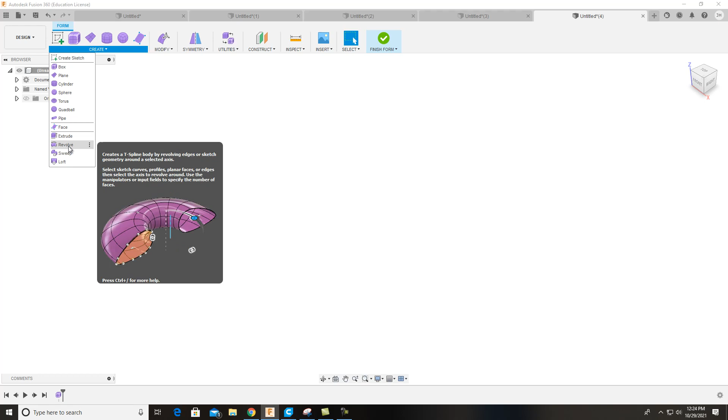And if you drop down here, you'll see you have extrude, revolve, sweep, loft, everything that you've used already in solid modeling that you can access. So let's show you a little bit about this, and I'm going to delete this off right there. There we go. Now, let's get into this.

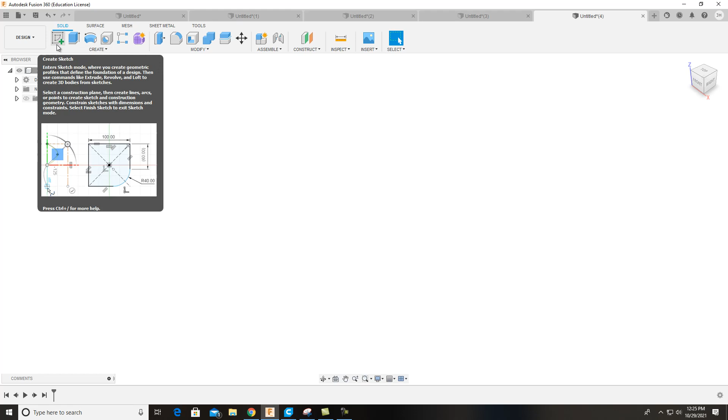So first, I want to draw just the normal way of drawing a sketch and extruding it, and this is what you're going to do for this lesson as well. So I've got some existing work that I'm working on. I've got a linkage between two pieces that's pinned together, and in the center, the actual spline that's holding those 2 points, I want to make it in an organic shape.

We're going to take and sculpt it just like additive manufacturing does. It takes these shapes that are more natural looking, more curves in it and things of that sort, as opposed to kind of the way manufacturing is now, straight lined and everything of that sort.

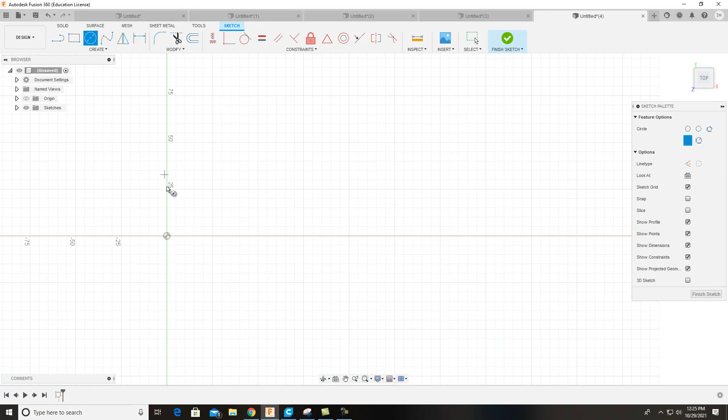So let's say, for instance, I want to put this on here, and I want you guys to do the same thing. I want to make a 50 diameter here. I'll make another, let's see, 60 diameter there. Let's go a little bit larger. Let's go 70. And I want this same thing over on this side, okay?

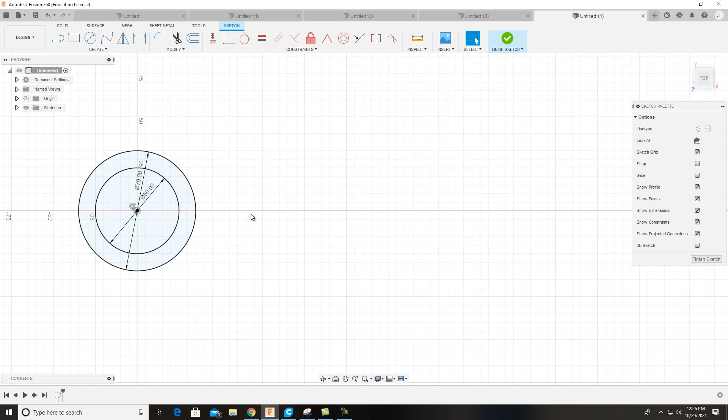And we'll do it, let's say 200 millimeters, okay? So again, this one would be 70, and we'll do this another one. That's 50.

Now, dimension them out. I want these both to be about 200 millimeters away. And as far as the vertical on them, we'll do that too. I'd rather them to be, click on this and click on that. And so undoubtedly they are perfectly aligned. Yep, because they won't let me do a vertical on it. So they should be straight on that line.

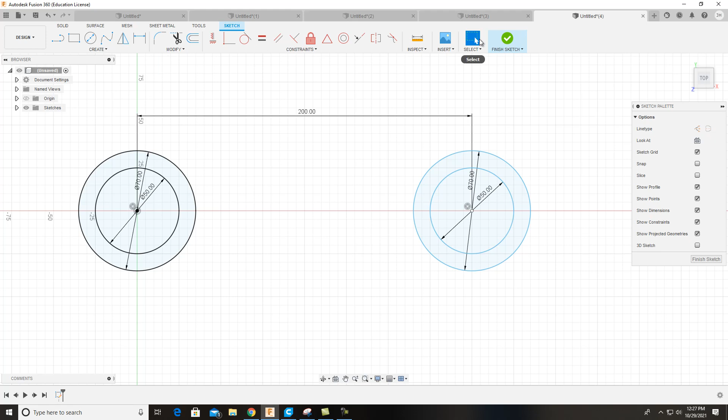And go ahead and extrude it just like you normally do. Make a solid out of it. I always like to turn it when I make a solid. So extrude, catch that point and catch that. Extrude it up about 30 millimeters. Now right in the center of this thing, I want to put a linkage between these, okay?

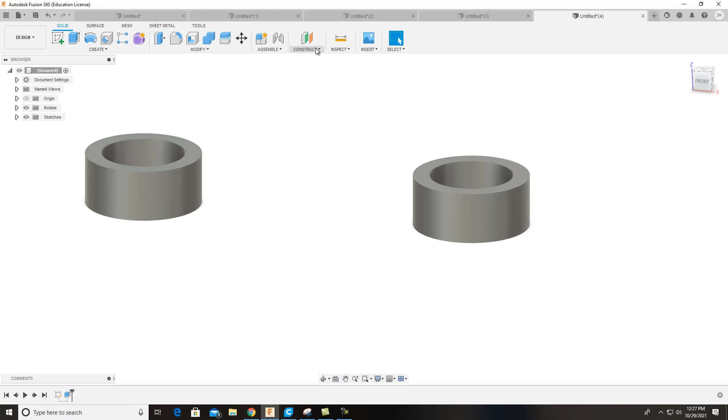And to do so, I want to go up here and set myself a work plane right in the middle. So go to Construct, come down to Midplane, catch the top of that. Rotate it over and do that. See how it puts that in there, hit OK on that, and you're good to go.

Now what I want to do is take and make me a sketch on the face of this. I want to go ahead and, like I said, these are solid, and I want to go right in between these and make some type of weird organic shape, you know, something different than just a straight line, okay, that connects the two. So to do that, there's something I need to do.

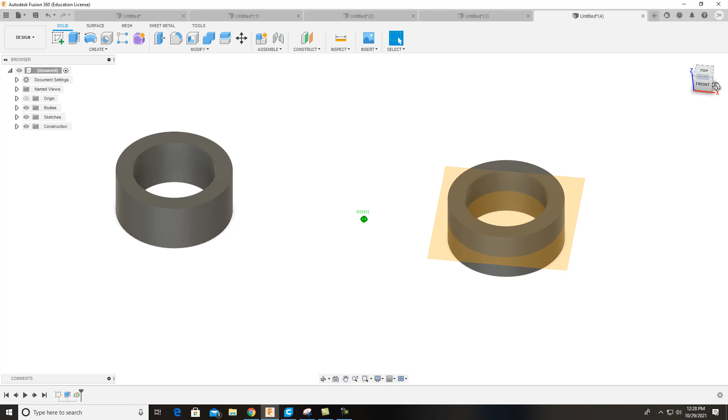Now, I can go right here to Create Sketch, and I could put that in there, okay? So I click right on that new plane that I made, and I'm just going to start in here inside of this. Or actually, before I start that, I want to go here to Create, because notice how it's not picking up on the tangents or anything.

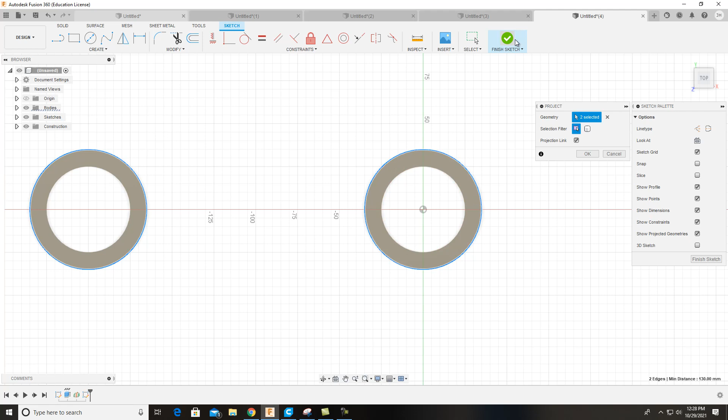If I go to Create and come down here to Project, it projects the geometry for me, okay? And now when I come in here, see how it catches that? That's really nice.

And I'll just bring this one over in there, maybe at a little bit of an angle. Actually, I want to come down like this. Like that. And I'll bring this line to about right there. Or actually, I should have brought it all the way to the edge. I'm going to bring it all the way to the edge.

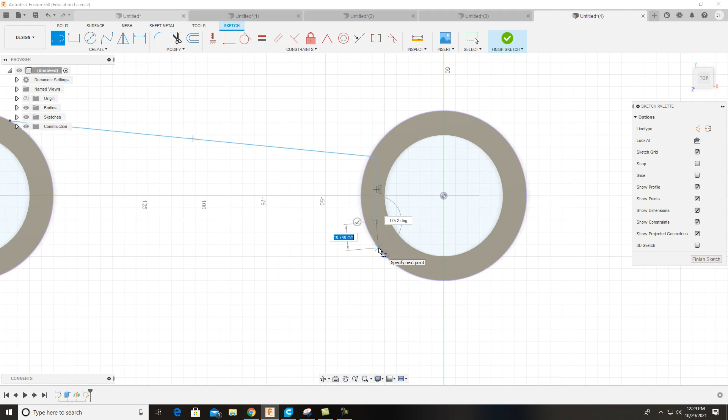And line, I lost my line, so I have to hit line again. I'm bringing this one in, and I want to bring it in and touch it about right there. And then just make sure that you connect all of these together, just like that, okay? And then finish your sketch out.

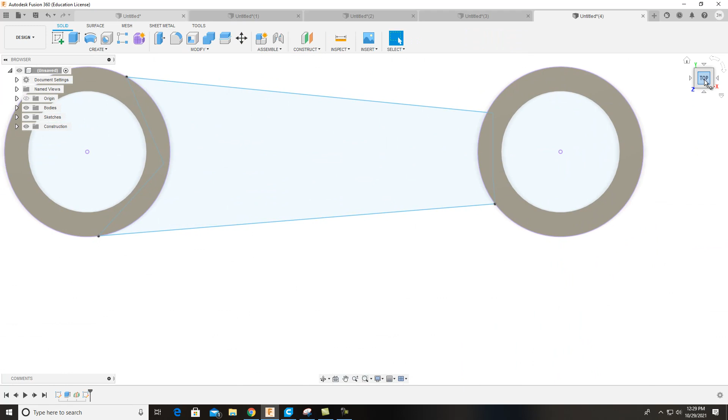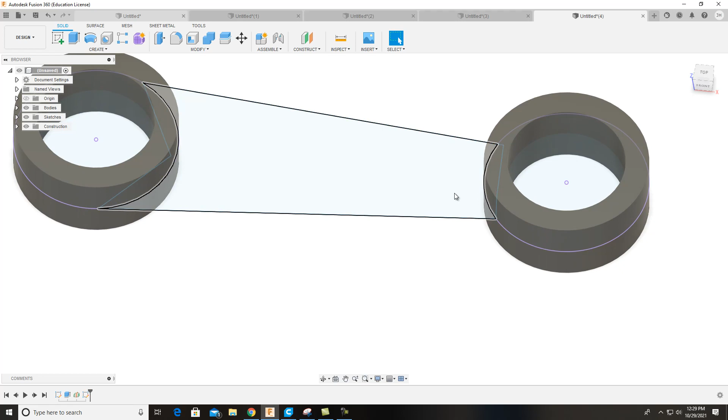So I've got this shape, and basically, if you're working for a company and they say I have to have these cylinders located, so there'll be some pins to be able to link something together. But the shape, I want it organic shaped. And of course structural analysis would have to come into play. But let's go in here and I'll show you how to turn this into a sculpt, into an actual form that you can sculpt.

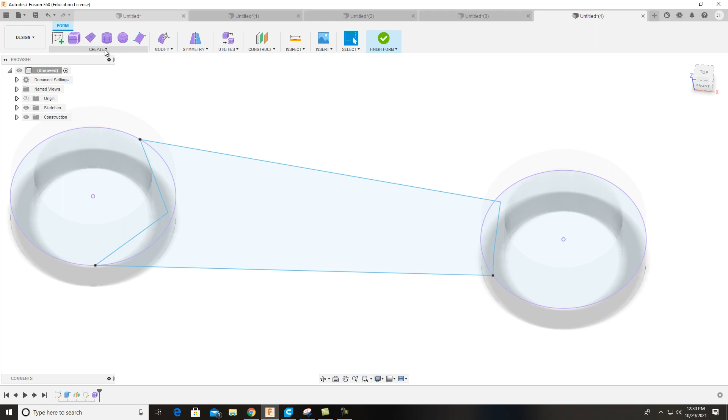And to do that, all you have to do is hit form, create form, and see how it brings that form up. Now when you get in here, you're in the form, you have box, you've got all those things we saw earlier. We did the cylinder last time. But come down here into create and you've got an extrude.

Do y'all see that? And I want to catch all of this, just like that. You see that? I made sure everything came up. And I want to make this, let's take a look. I'll kind of turn it around here.

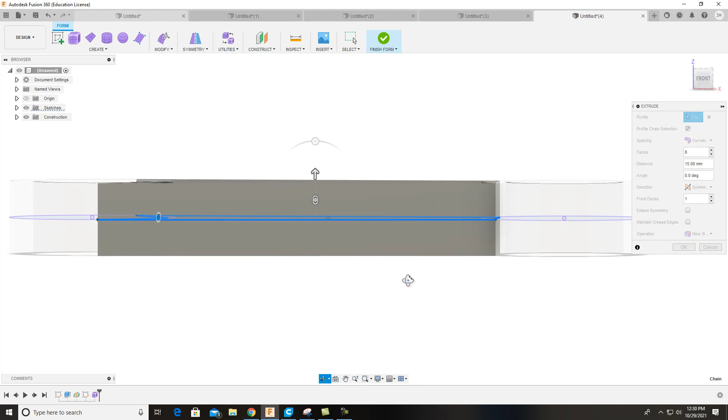It's going to do 8 faces when it splits it. And I can do more than that. I'll do 12, so when it splits it'll be split in 12. Each section here will be 12. Now it's got 15. I like the 15, but it's a little too much.

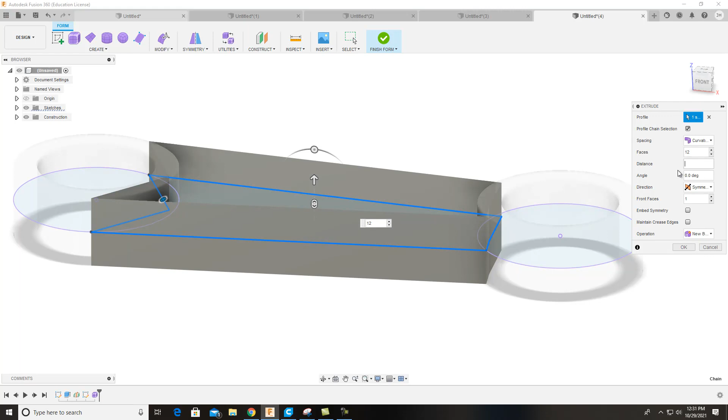I want to do 7.5. And what it is, it's doing double because I've got it on symmetrical. Last thing I did must have been symmetrical. So I want it symmetrical on both sides. So 7.5, 7.5 makes 15. So hit OK on that.

And then finish my form. So now, when you're looking at it, you're like, okay, well, that doesn't look very natural to me. Okay, well, it's not yet. We're going to make it that way.

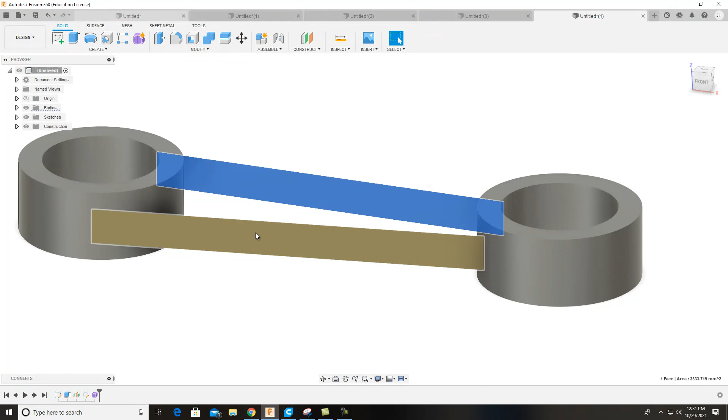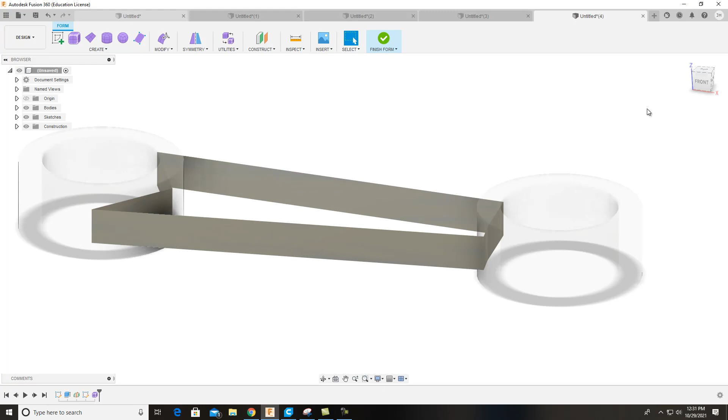If you come over here, and I want to start sculpting this, you're like, well, where's all the boxes? You told it 12 for each face. Where are they at? If you come down here and right-click and go Edit. Now when you come over here, you notice what I'm saying, how this thing should be divided up. There you go. So let's get in here and let's make some stuff happen here.

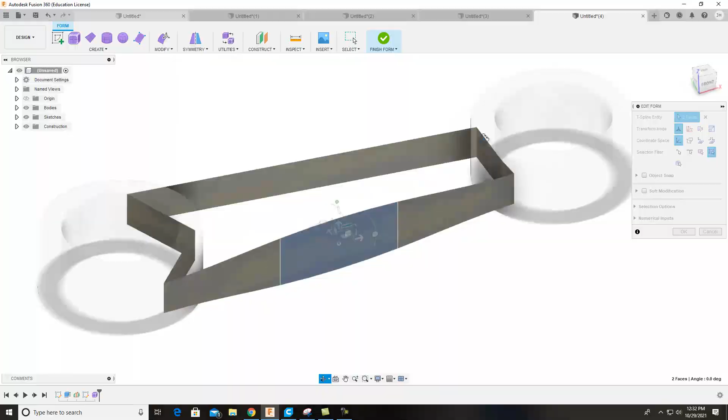So I click both of those, right click, edit form. I'll grab that. I'm trying to think of what I want to do here. Okay, I'll pull that in just a little bit because I want to have a little organic shape like that. I like that. Let's do the same thing over here, just a little bit, not much.

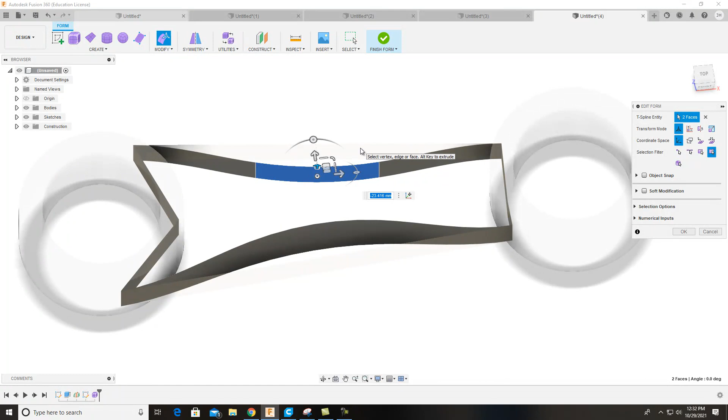This is going to be your design. Kind of pull that down into it a little bit. And you've got shading going on right now, I'll pull that down in there just a fuzz. All right, rotate it around. Oop, that one went downhill. I didn't want that to happen.

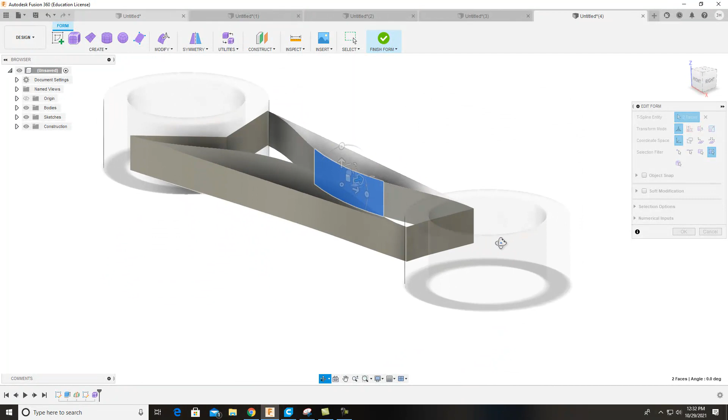So always undo and then grab that and I can turn. That's why I always say if you keep rotating, you kind of see if there's any mistakes that's occurring. Okay, this is the old, this is the new. So it's all looking good.

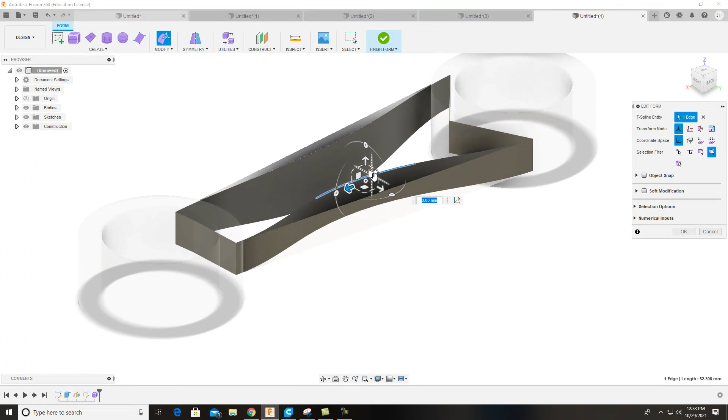Now I can go in there and click on maybe the top of it and kind of roll that in just a little bit. Come over here and grab that one and roll it in just a fuzz. Do y'all see what I'm saying? Getting that organic shape. The bottom of it now, what do I want to do with it?

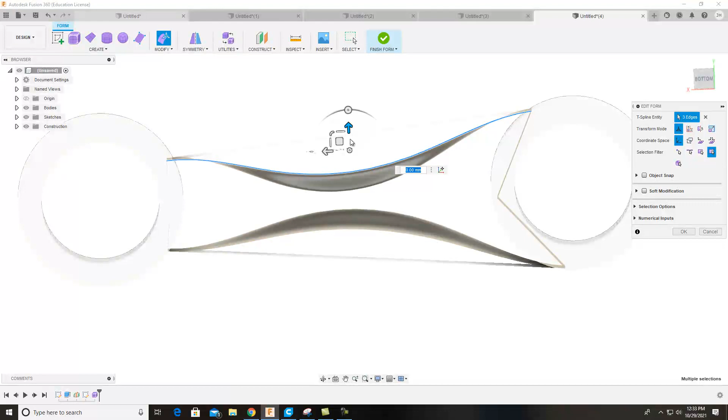I'll grab that and that and that. I want to pull it just a fuzz in. I'll grab this one here too. Pull it in just a fuzz.

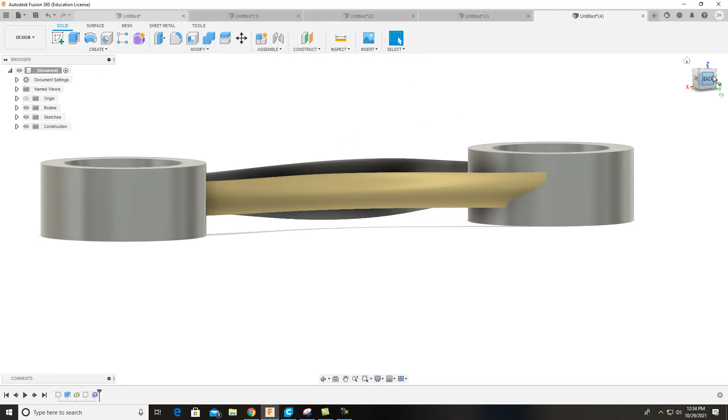And we're starting to see some pretty wild shapes here. So I finished that, I'll take a look at it. Wow, that's pretty neat.

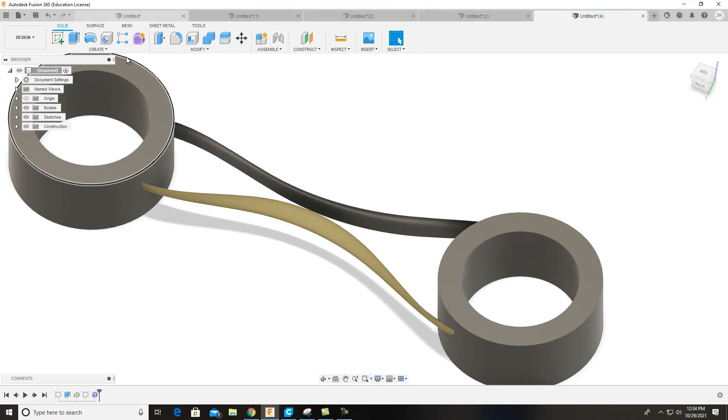Okay, so after I get something that I want, remember how we did it last time? I want to put a cover on the top, these are solid, but this is not. Let's turn it into a solid. So first thing I want to do, if you guys remember, is in surface up here, I want to do a patch. So put a patch on the top, rotate it over, and put a patch on the bottom, just to finish that up.

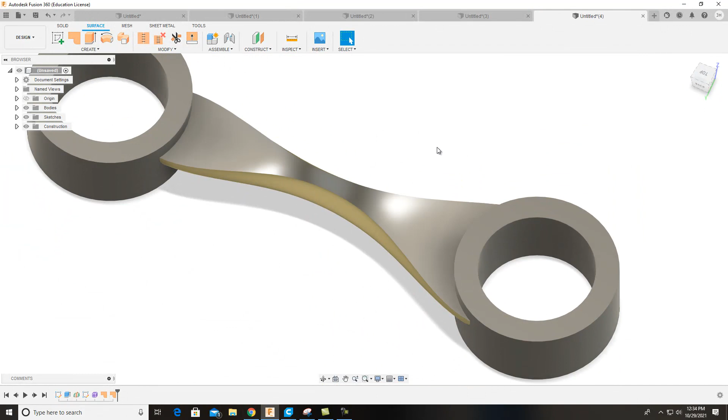So all that is done. I've got my patches on there. Everything's looking pretty good. Now we've got to turn that into a solid, okay? It's not a solid, even though it's covered up and patched, right?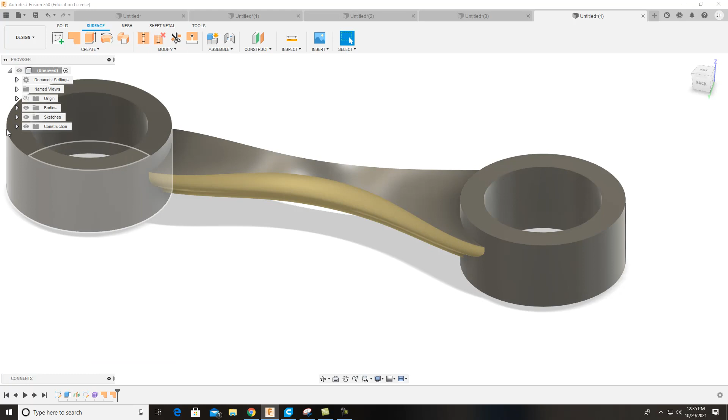So this is what you do next. Of course, you remember to stitch, but these things are in the way. All you got to do is come over here and you can hide those bodies, but it's hiding that as well. But I can also come down here. Let's see if I can get my bodies there. There you go, I can turn those bodies off just where I've got this, okay?

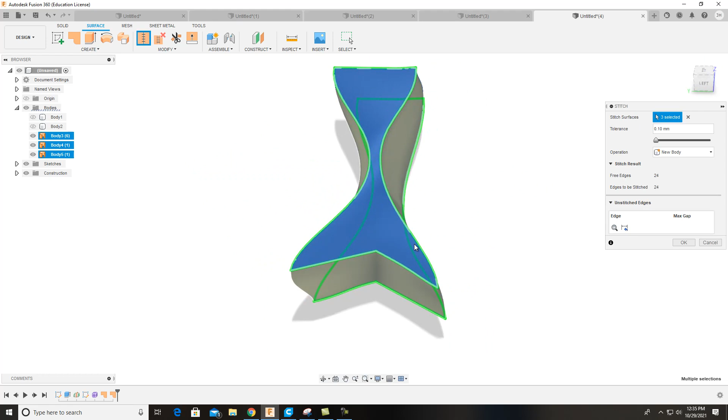And it's not a solid yet, but it's going to be when I hit stitch and I grab everything. Make sure you grab everything on this, and okay. Now that is a solid piece because it's stitched.

And then to bring those others back, those two pieces, we just click on the little eyeball here. It puts it back on there. This is a solid part. Well, almost. They're separated. Well, to get those to come together, it's really simple.

You want to go to Solid, and there is a tool here that's called Combine. Click on Combine, grab that, and grab that, and OK. Now this should be a solid piece for you.

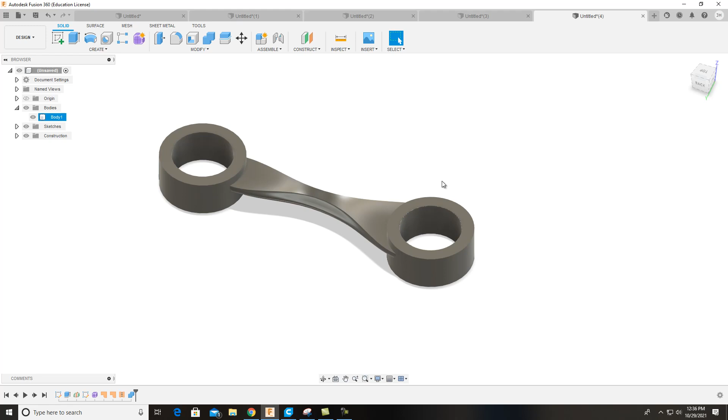So I want to take right now, and I want to do a snipping tool. I need to save that one from last time.

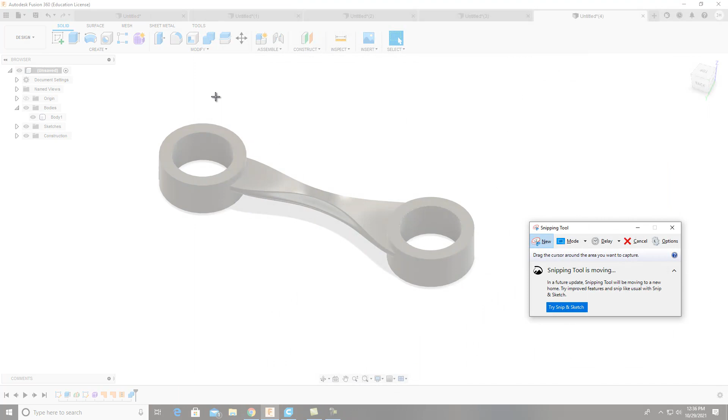So I hit New. Come in here and grab that. File, Save As. And I want to put this somewhere where I can find it, just like you guys do. Be organized again. And I'm going to make me a new folder. This is week 8. Week 8.

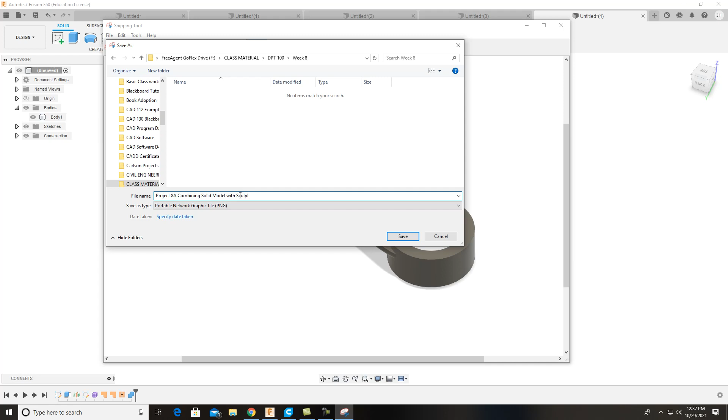And this is going to be project 8A. And this is combining solid model with sculpting mesh, and save. All right, we've got that done.

Now I want to come in here and I want to turn this to an STL, 3D print, STL. All that's good. You click on the hole. Oh, you see how it clicked? And do you see all the triangulation? This is a solid piece. Do you all see that? So what you want to do is I want you to take a picture of this, just like that.

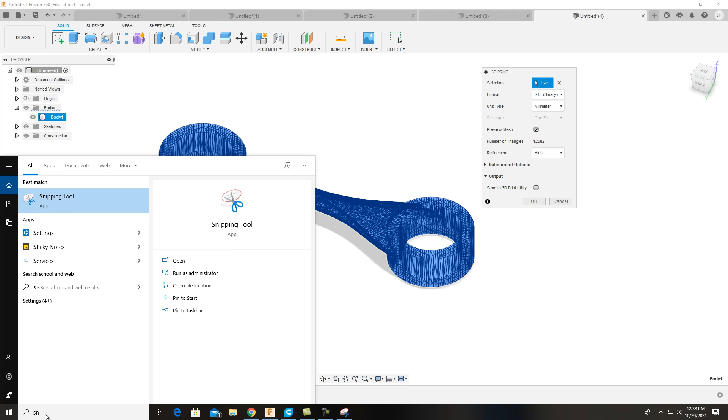File, New. And I want to catch all of this. Project 8A. Combining, and I just click on this one. And then I'm just going to change the end of it as STL triangulation.

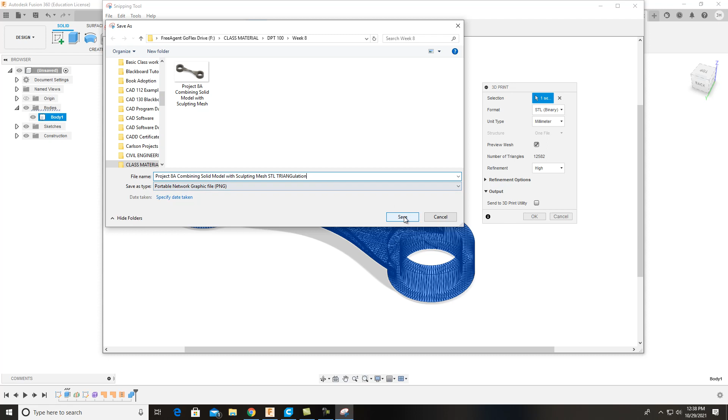Close enough. So you got that part, and now when we save this, we're going to go in, and you guys are going to, of course, get the G code on it for me.

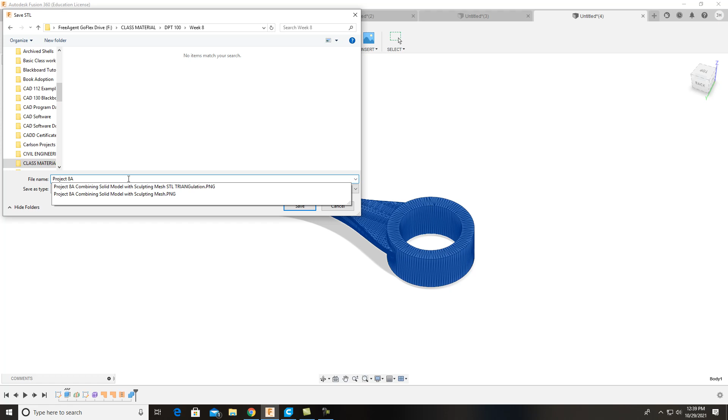All right, so we pulled up Cura. This is the last part that we did. File, new project. Clear the build plate.

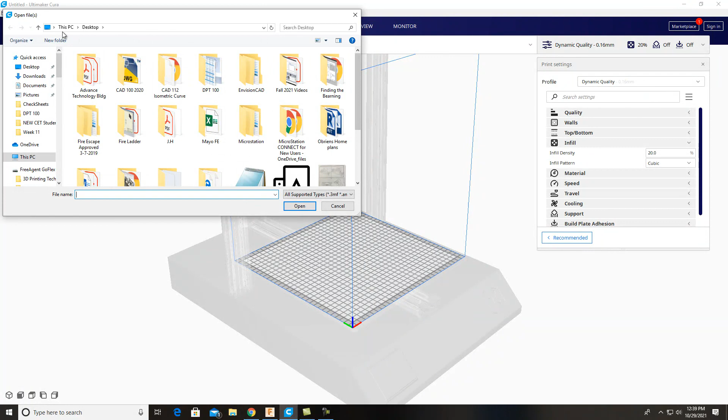And do it for the Artillery Sidewinder, and come back in here and let's grab that one that we just did. That's why it's good to be organized so you know exactly where it's at. Project 8A week 8. Lay that in there, and that's a pretty good size part there. So it all fits in there good. It looks good. I don't have to do any movements on it.

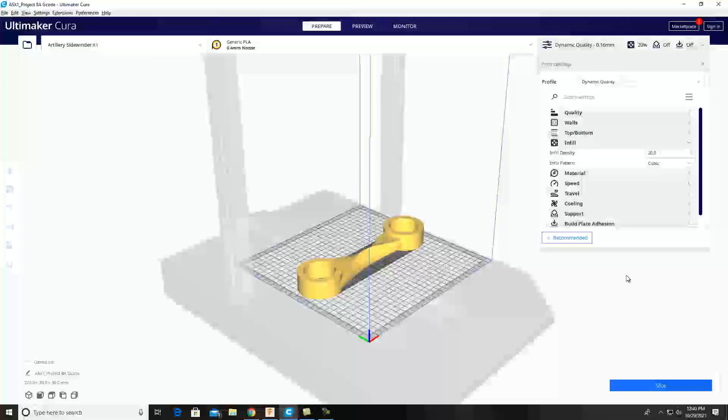So on this one, we're going to do 0.16 on the profiles, and we're going to do an infill of about 20%, that's good on that one. Make sure that we do a support and adhesion, customize, and I want to do a gyroid on this one for the infill pattern. And then I want to do a slice, and let's take a look at it.

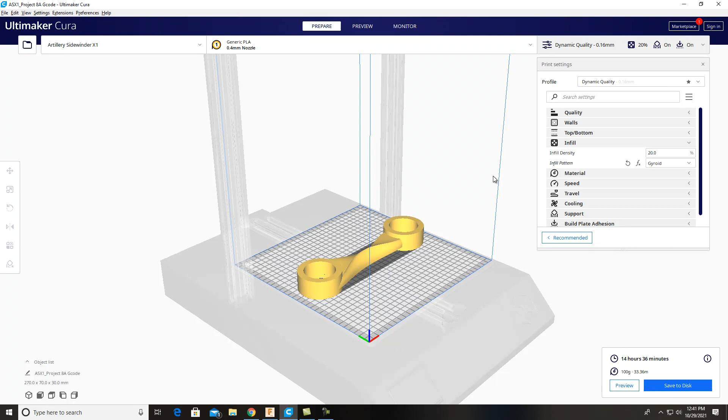14 hours and 36 minutes. Let's do a preview and see what this thing looks like. This is what it's going to look like. You can see the support under there.

And I want you guys to take a shot right there. Oh yeah, that looks good. I want y'all to take a shot of it right there. Okay, so do a snipping tool there.

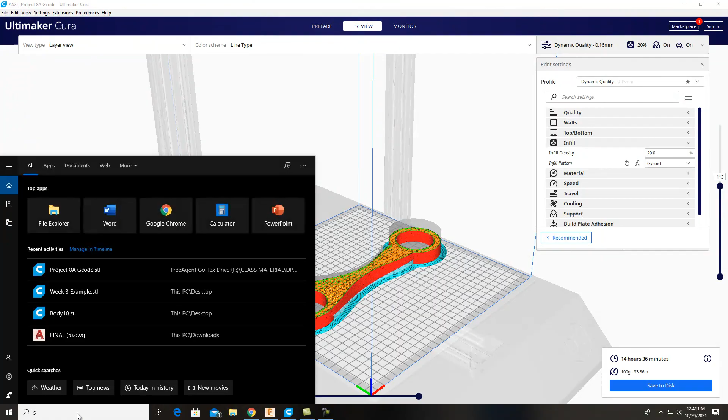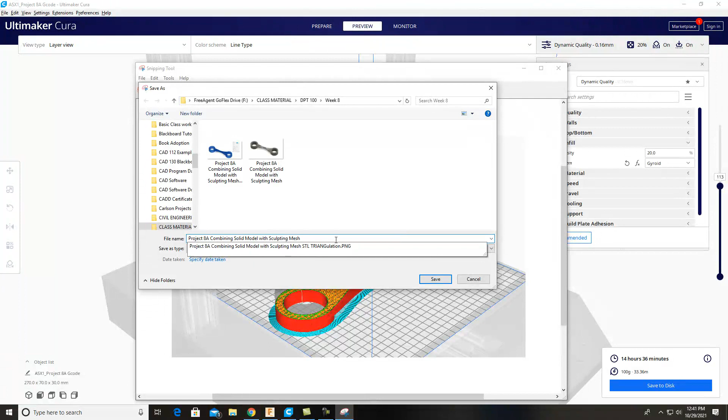And save that for me. And this would be the G code image. Okay, save. And then, of course, you want to save your G code.

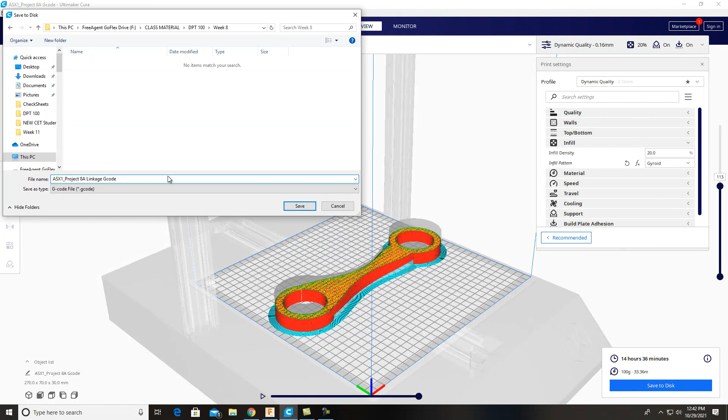And that will go on your turn-in assignment this week as well. 8A, and this one would be, I was going to put linkage. It looks like a linkage, so I know what it is, and save. Okay? So that's what I want you guys to do for me on this specific task.